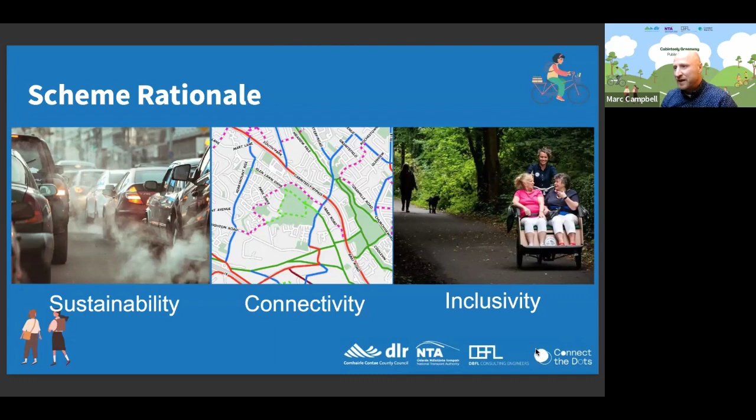So in terms of the scheme objectives, firstly it's to enhance connectivity between Cornelscourt and Cherrywood for pedestrians and cyclists, and to encourage more walking and cycling trips.

Two is to improve safety for people walking, wheeling and cycling, by maximising segregation of pedestrians and cyclists from vehicular traffic. And that's quite an important one to bear in mind - it's about the segregation, it's about the safety and security.

If we manage to get that and people feel safe and secure, there's more likelihood that we can encourage people to get out and do those short trips by wheeling, cycling, and walking, rather than jumping in the car because they feel it's a safer way to do it - to reduce reliance on car trips by providing sustainable alternatives, such as active travel means of getting around.

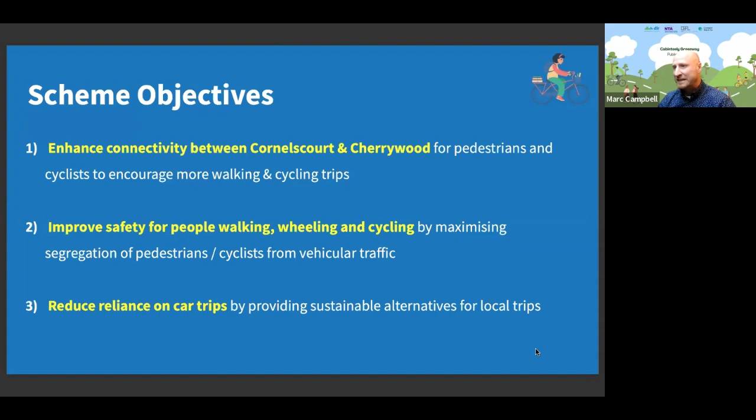Number 4 is to contribute to the achievement of climate action targets. And that brings us back to the press release we received this morning from the EPA, and how we can start to reduce our emissions in the transportation sector.

Five, to improve accessibility to public transport by walking and cycling - just ensuring that everything is connected, that we can walk and cycle to our bus stops, our Luas lines, and our train stations, leave our bicycle or just jump on the train and get to our destination.

And to deliver a proposal that is holistic in its approach, focusing on nature-based solutions and sustainability where possible.

What does that mean for this particular project? We're really looking at things like surface runoff, and how we deal with downpours and deluges so they're not just going straight back into the stormwater system, which is already under pressure, but how we deal with it and recharge the surrounding green environment. It's also about the planting of trees, the management of pollinator sites, and SUDS, the sustainable drainage systems.

So there's a huge amount of things we can focus on in terms of positives for the locality, and finally, to produce a design that is sympathetic to all environmental issues.

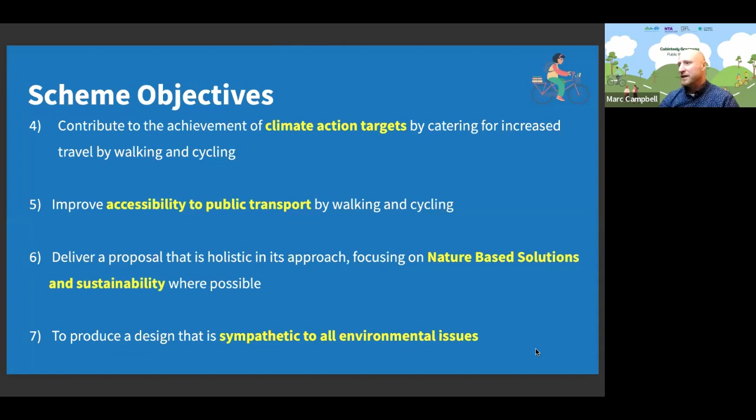This slide highlights that greenways aren't just about the rural environment. There's a huge amount of press about fantastic greenways around the country, often associated with disused railway lines, which are great for tourism and the local community. But equally, we can have greenways in urban environments, taking a slightly different form as a sequence of green spaces, connected by the greenway. It's about pulling routes through safer environments - parkland and green spaces in residential areas - connected to the community, with huge benefits resulting from these types of projects.

You can see here in Blackrock Park, a great park to visit to see how these projects work successfully. At the Booterstown entrance, before it was put in place, it was a really ill-defined approach into the park - a green space that just bled out into a windswept junction with no definition at all. As you can see now, it's a really inviting approach to the park itself. We now have a strong entrance on the Blackrock Village end and a strong entrance on the Booterstown end, showing the improvement to the parkland itself.

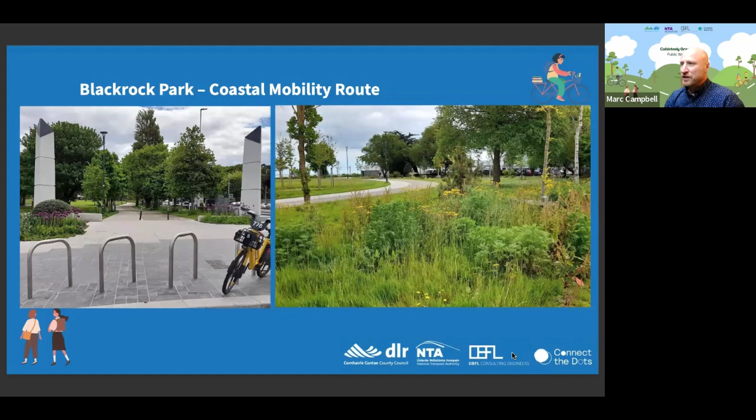The purpose of this slide is to identify a few concerns we see raised time and time again - people worrying about how emergency vehicles get to their destinations because more road space is being taken over by cycleways or pedestrian ways.

The fact is, these are improvements for emergency vehicles. In times of congestion and peak volume, when there are lots of cars on the road, cycleways are freed up for emergency vehicles to use. You can see the image on the left from London, showing an ambulance using a shared cycleway, and our own coastal mobility route in Dún Laoghaire, where an ambulance is able to use it. Not only do they bypass congested traffic, but for Cabinteely Greenway, they'll be able to reach currently inaccessible areas. When the greenway goes through, it opens those spaces up again for emergency vehicles to access.

One other small concern that keeps cropping up time and again is the fact that taking cycleways and pedestrian ways away from road space is somehow seen as a negative towards elderly people and people with mobility difficulties who really need to use the car. In fact, it's far from that.

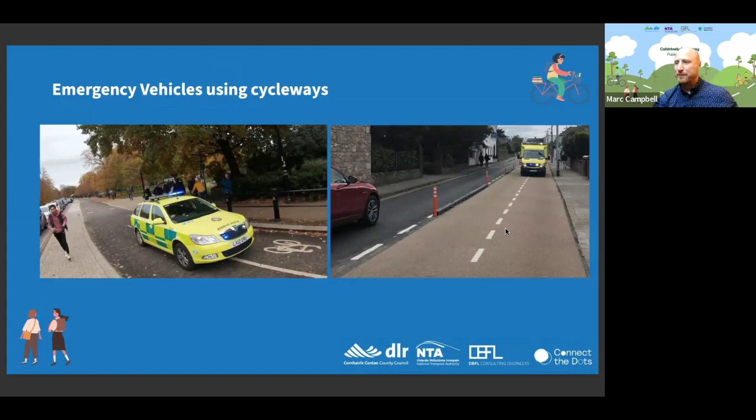Great, okay, so this is just a brief bit about us. We are a stakeholder engagement agency, so we work with various local authorities, government bodies and government departments on anything to do with stakeholder engagement and public consultation.

These are just some of the values we bring to the project. I'm going to be quick about the consultation process so far so you get a sense of what we've done and what's come out of the consultation activities, then I'll hand you over to the DBFL slides giving the overview of the plan so far.

We had a public session last month in June, and out of that it was decided that this webinar needed to be held to tackle the fact that we had many more people who needed to engage with the project in this way. So it's positive — many people wanted to engage.

We had 5 workshops last year and the start of this year: a residents workshop in November, a community and businesses workshop in December, and then primary, secondary school and disability advocacy group workshops in January and February of this year. A total of about 104 attendees, probably more based on the public session where we had over 100 people.

At the workshops, the main focus was on a couple of themes which you'll see throughout these slides: number one, safety; secondly, design and use; and thirdly, the Greenway route options and layout.

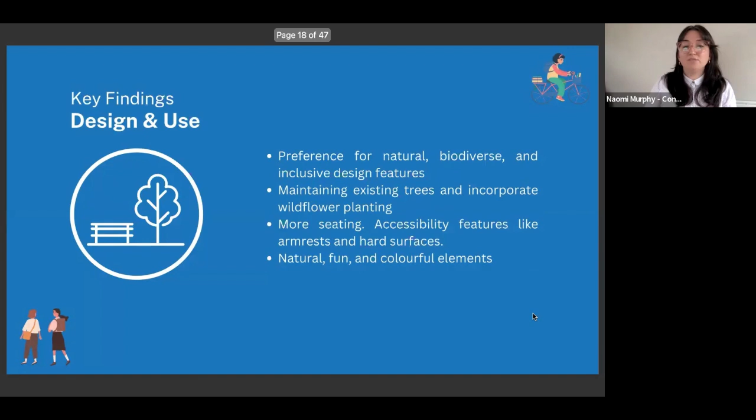In terms of design and use, there was a preference for natural, biodiverse, and inclusive design features, maintaining existing trees and incorporating wildflower planting. More seating was seen as a positive, along with accessibility features like armrests and hard surfaces, and a preference that it should be natural, fun, and have colourful elements.

In terms of route and layout, discussion focused a lot on path design, markings, and surfaces. There were concerns around visual contrast for individuals with visual impairments and the inclusion of shared paths. Some of that will come up in the next slide.

On potential impact on existing environments, there were concerns about noise pollution, disruption of natural habitats, and being sensitive and conscientious to that, as well as disruptions through construction. There was also positivity around improved local connectivity and excitement about the environmental benefits of the project.

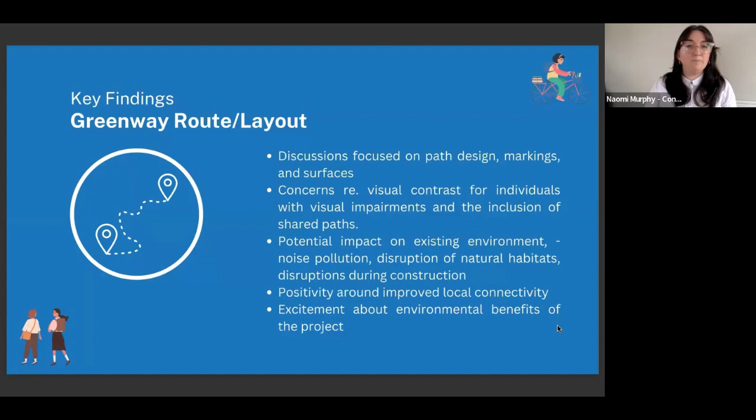This is one of our last sections, around accessibility and inclusivity. In the disability advocacy workshop, comprehensive input was provided on various things to consider going forward - the importance of contrasting path colours, consistency in design so the delineation between paths is clear, considerations for visual impairments, standardization in layouts, accessibility of seating, play areas, signage and shelter, and the need for inclusive design and post-design consultation with disability groups to make sure all concerns are addressed.

For next steps, a full report will be published on the DLR website, including feedback from the public session last month, today's webinar feedback, and tomorrow's recorded viewing session for anyone who can't access Zoom or get online for whatever reason - that'll be in Deansgrange Library at 10 a.m.

Regular updates will be posted to the project page on the DLR website - I can make sure you have that, there's a link at the bottom here. I can circulate these slides to anyone registered to this webinar, and anyone registered in general will be notified via email on the further consultation stages.

The public will be invited again - anyone on this call, anyone engaged so far - to make further submissions on the final plans during the statutory process, the Part 8 process, which is to be confirmed. This gives a sense of where we were with the design workshops last year into the start of this year with community members, the preliminary design in phase 2, which includes the phase we're currently in, and then the statutory phase, happening in Q4 of 2024.

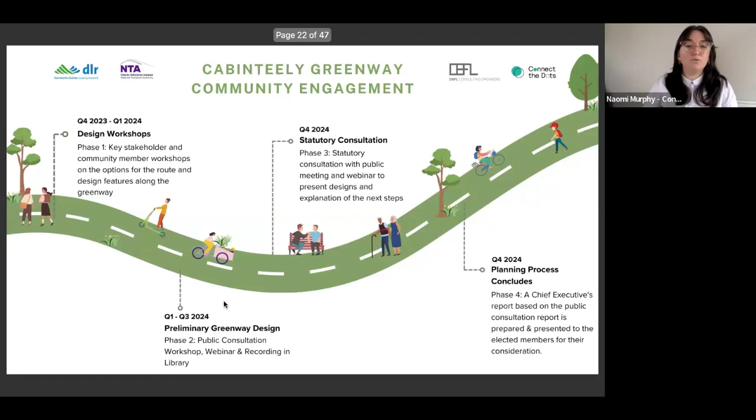Thanks, Robert. Thanks, Naomi. Can you hear me? Yeah, great. Good evening, Robert Kelly's my name.

I'm director with DBFL Consulting Engineers, and I'm just going to add a bit more detail to what Mark and Naomi have covered, specifically in relation to the proposed or emerging proposed scheme. Naomi, if you want to move on a slide or two there.

So what we'll cover is the proposed route or the study area under consideration. Then we'll look at the emerging draft designs and go into a bit more detail to give some background, and then reiterate some of the next steps to wrap up before handing back to Naomi. If you want to move on a slide there, Naomi, another one again please.

The proposed route, or the study area, is in essence just over 2 kilometres in length. The scheme is to connect Cornelscourt Village, around the junction of Old Bray Road and Cornelscourt Hill Road, and then extend eastwards towards Brennanstown to connect with the recently completed Druids Glen scheme, and then onwards into the Cherrywood Greenway network.

For ease of reference and ease of assessment, we've broken the study area into four character areas or sections. I'll go into each of those sections now, talking about the current conditions and constraints, and then the emerging preferred designs.

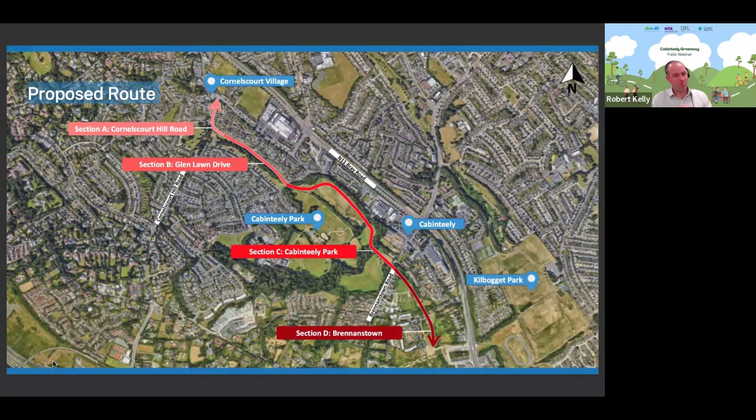So, the first section, as I said before, the extent of the scheme is at the junction between Old Bray Road and Cornelscourt Hill Road. This first section, in essence, really addresses Cornelscourt Hill Road.

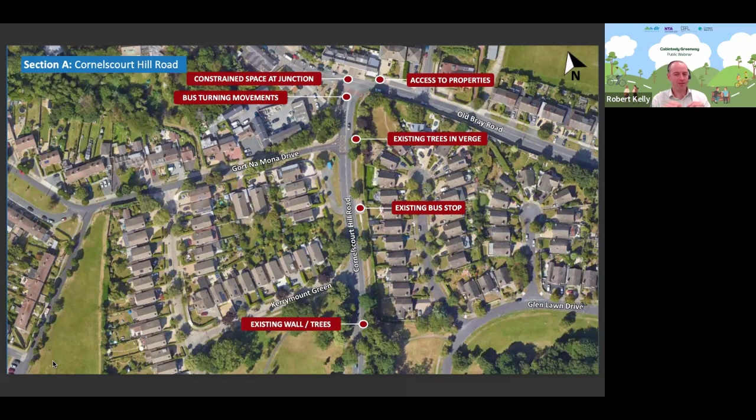Here we have a number of constraints to consider. Obviously, Old Bray Road itself is quite restricted in terms of its width. We have to accommodate existing traffic movements, bus movements. There are a couple of bus stops, and there are also existing trees and boundary walls there which have to be respected.

Bus stops along this stretch will also be upgraded, and there'll also be a further controlled crossing point on Cornelscourt Hill Road to aid anybody looking to access the Greenway, particularly from the likes of Gort Na Mona Drive and Kerrymount. So the scheme then continues through into section B, which is on the next slide.

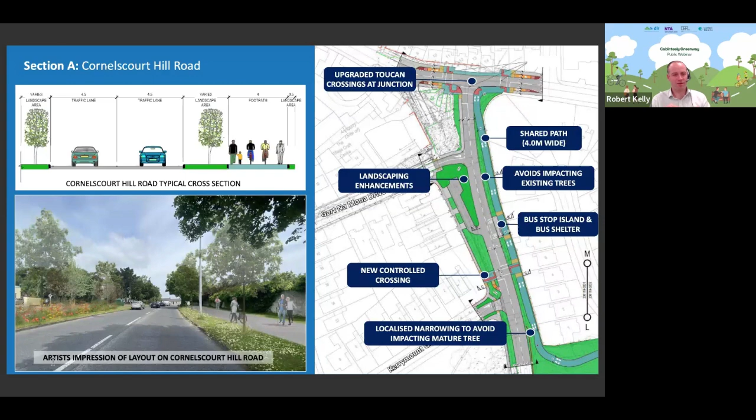We have existing through traffic. We also have the stream and the trees adjacent to the stream, the green area surrounding the stream, which is of high value from a public amenity and biodiversity perspective. So we want to respect that.

We've noted safety issues, particularly at the roundabout at the Glen Drive junction at the eastern end of this particular stretch, and then obviously facilitating access for residents within the area. There are also quite challenging gradients down towards the stream, which we have to negotiate also.

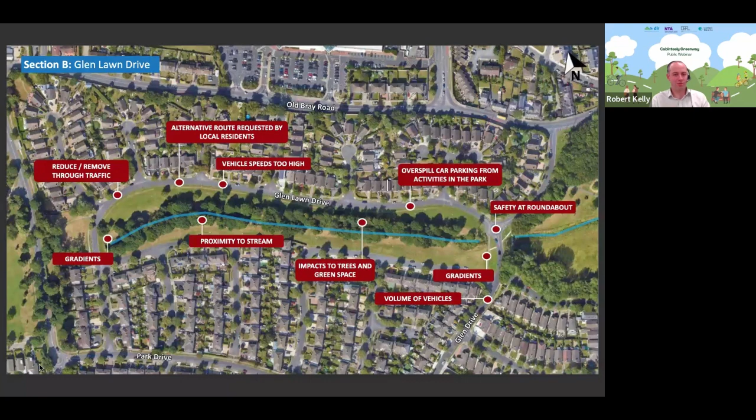In this particular section, we haven't finalized our plans with regard to what option would be preferred. There's a number of options which I'll present here - three options for consideration at this stage - but I'll go into more detail as to the different characteristics of those options now.

Option 1 essentially involves the provision of a shared use Greenway on the northern side of that green area, to the north of the stream, but immediately adjacent to the Glen Lawn Drive road. That'll be a 4-meter wide shared path, as is proposed on the Cornelscourt Hill Road section also.

We're trying to keep away as much as we can from the existing trees and the stream itself, and in doing that, we would preserve all existing trees, and we propose to enhance the public realm and planting around there also, as there'll be proposed additional greening between the Greenway facility itself and the adjacent street.

A key feature of this particular option is that there'll be additional traffic calming proposed on Glen Lawn Drive to reduce speeds and make Glen Lawn Drive safer. There's a proposal to provide landscape build-outs, and I'll give you more visibility of that in the next slide.

At either end of Glen Lawn Drive, there are two proposals: to upgrade the roundabout on the eastern side to provide enhanced pedestrian and cycle crossing facilities and improve general safety, and then on the western end, to implement a modal filter through Glen Lawn Drive, which would facilitate pedestrian and cycle access only. I'll go into that in more detail in the next slide or so.

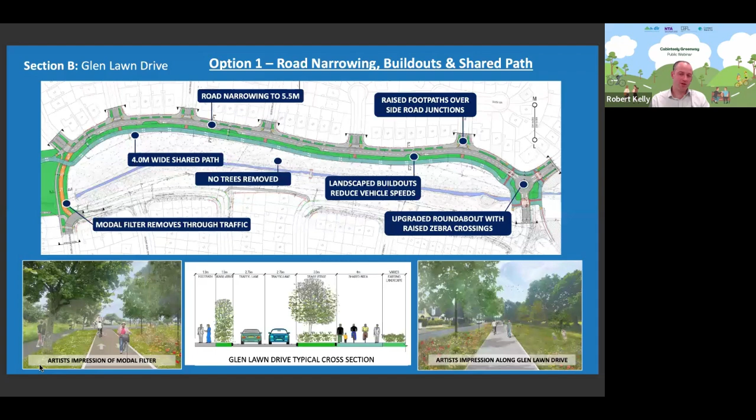The next slide goes into a bit more detail on the type of arrangement proposed under option 1, which are basically landscape build-outs. These act as a dual purpose traffic calming feature, whereby traffic would have to give way in one direction for the other, calming traffic on Glen Lawn Drive, and the additional build-outs could facilitate landscaping and some of the SUDS features which Mark alluded to in his slides.

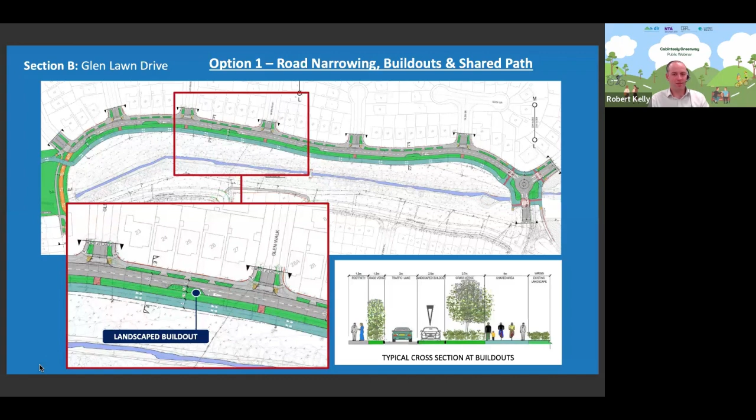The next slide touches a bit more on the proposed modal filter, which is a measure to reduce through traffic on Glen Lawn Drive and protect it for local access only, providing a much calmer street environment. This is a feature which has been implemented in a number of locations across Dublin and Dun Laoghaire-Rathdown recently.

Such a feature has been implemented in Eden Park, near Goatstown, Dromartin area, where there was a significant issue in relation to through traffic. That was removed following the implementation of the modal filter, which allows for movement of pedestrians and cyclists only. I think that has been well received by residents in that particular area.

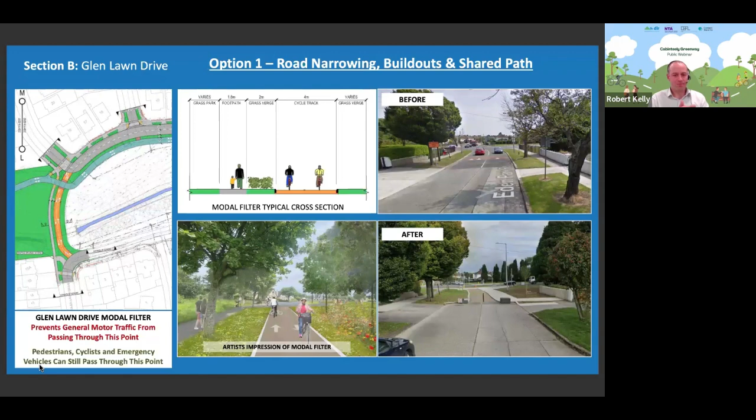The next slide indicates how the through route from Park Drive to Glen Lawn Drive would be removed for vehicular traffic, but facilitated for pedestrians and cyclists. It still indicates that there is access to all residential properties via Glen Drive and Park Drive.

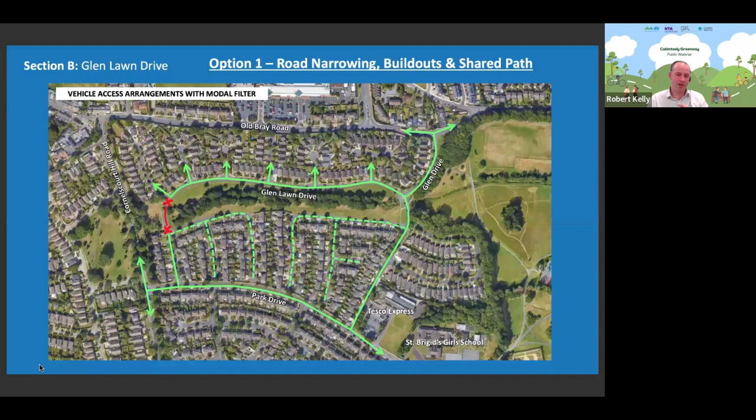Moving on to option 2, which is quite similar to option 1, but doesn't propose to implement any of the landscape build-outs on Glen Lawn Drive. So Glen Lawn Drive would, as you can see from the cross-sectional image, keep one traffic lane consistently in each direction. The Greenway facility would again be a 4-metre wide shared facility with a landscaped buffer between it and the street. As with option 1, the proposal to upgrade the roundabout and the modal filter would apply.

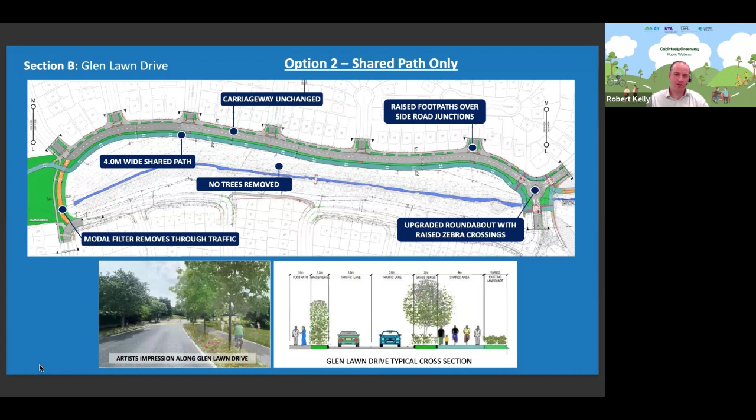Option 3 would essentially be, on the basis of reduced traffic volumes on Glen Lawn Drive as a result of the modal filter, it may be appropriate that pedestrians and cyclists use Glen Lawn Drive and share that street with vehicular traffic given the lower volumes and lower speeds that may be present. So there would be no proposal under this option to actually construct the Greenway within the green area, which would remain as is, essentially.

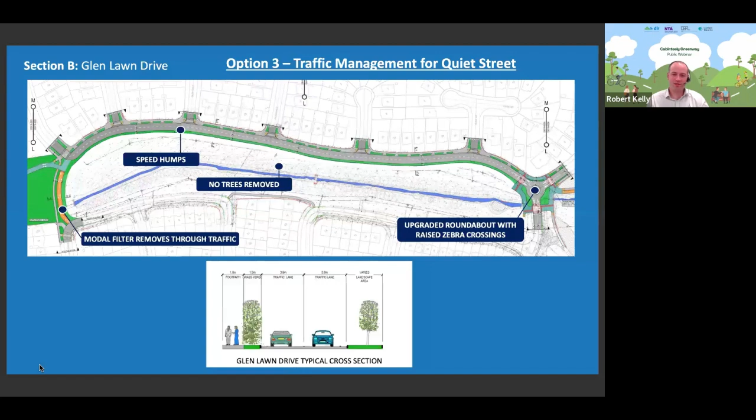So the next slide, we move into section C, the third section, which is essentially through Cabinteely Park. It's important to note that a lot of people will be fully attuned and knowledgeable on the various constraints within Cabinteely Park, both natural and man-made, as there are obviously constraints with regard to biodiversity.

We've got rich meadowed areas, and we've got to respect the built heritage of Cabinteely House itself. We've got challenging gradients through the park as well, to ensure we construct a scheme which is universally accessible. Then we've got interactions with other existing users of the park, such as the football pitches, which are quite busy particularly at weekends, and we also have extensive areas of woodland. We have to consider the opening hours of the park itself, and whether a Greenway facility through the park would be accessible, for example, in hours of darkness in the winter.

So the next slide, please. The emerging preferred route at this stage proposes to come to the park and follow the existing trails to the north of the football pitches, upgrading those routes on the basis of anticipated increased levels of activity in the park, and general activity of people accessing the pitches and other amenities within the park. The Greenway, crucially here, would provide for a separate 3 metre wide cycle track and a 2 metre wide footpath, as opposed to the 4 metre wide shared facility elsewhere.

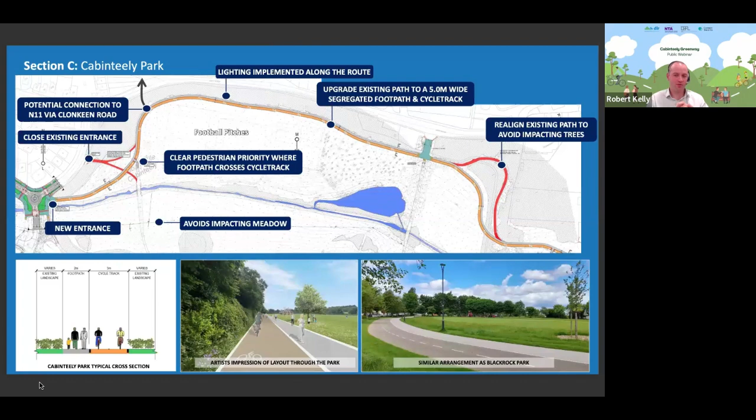So the next slide, Naomi, I think, shows the constraints associated with the final section, which is section D, fundamentally the section of the scheme which crosses Brennanstown Road and then leads on towards Druids Glen, into the scheme extent, essentially tying in with the Cherrywood Greenway network.

Some of the constraints here - obviously we're crossing a road at Brennanstown Road, so consideration has to be given to providing a safe crossing point. Then when we move westward beyond Brennanstown Road, there's an area of dense woodland which is not really accessible at present. There are informal trails, some elements of fly tipping etc, but generally it's a fairly natural environment which we need to respect. And we obviously still continue to border the stream.

And then as we cross Brennanstown Avenue, there's proximity to apartments and residential units which we need to respect, and also there's opportunities there with regard to integrating with future development of residential properties.

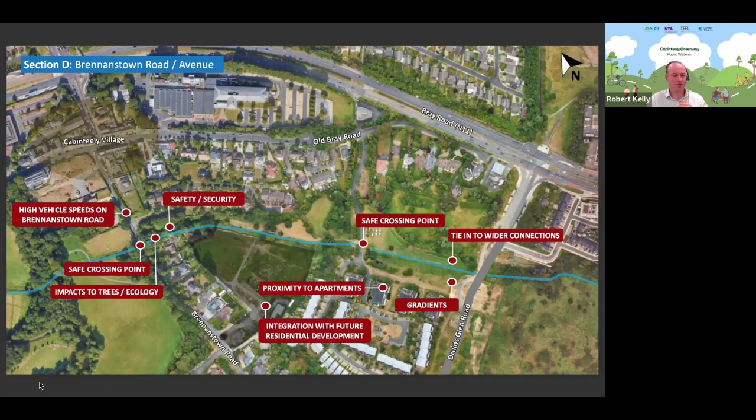So the next slide, Naomi, goes into more detail on the actual proposals as they stand. On section D, you can see as we come through the park, we have that previous arrangement of the segregated cycle and footpath. When we move westward of Brennanstown Road, we revert to the shared facility, the 4 meter wide shared facility, on the basis that the levels of activity would not be as high as one would expect through the park.

There's a potential opportunity for connection to the future residential scheme to the south of the stream, but generally we're keeping the Greenway to the north of the stream until we approach the residential development off Brennanstown Avenue, at which point we cross over to the south of the stream, respecting separation distances from those residential apartment developments, and we connect in with the recently completed Druids Glen bridge scheme.

So the image on the bottom right, the center image, shows the 4 meter wide proposed shared facility through that section just south of Carraig Glen, and on the left we have a cross section which shows, quite crudely, how a 4 meter wide shared section or greenway would look in the context of the stream.

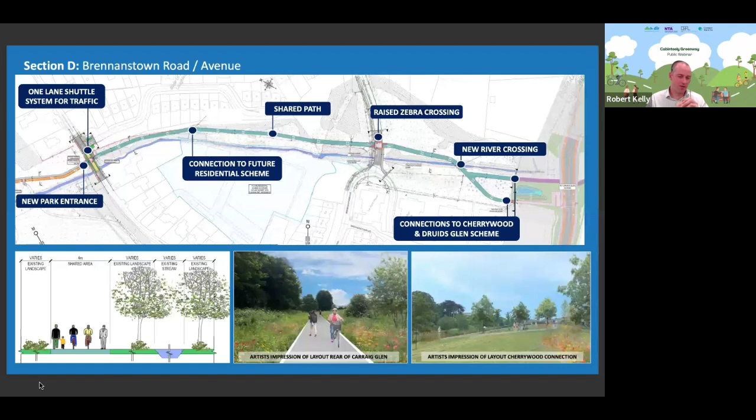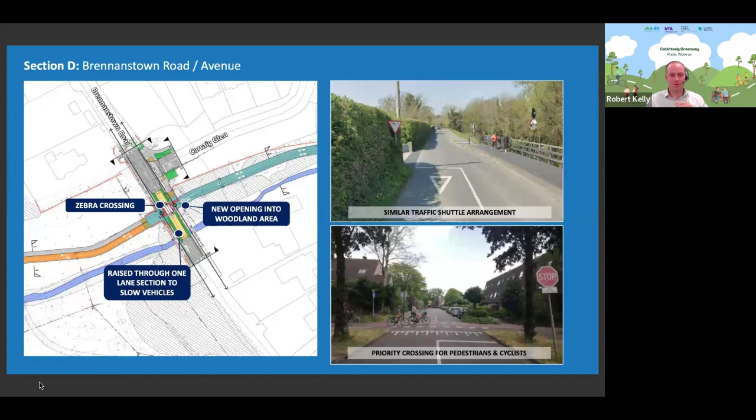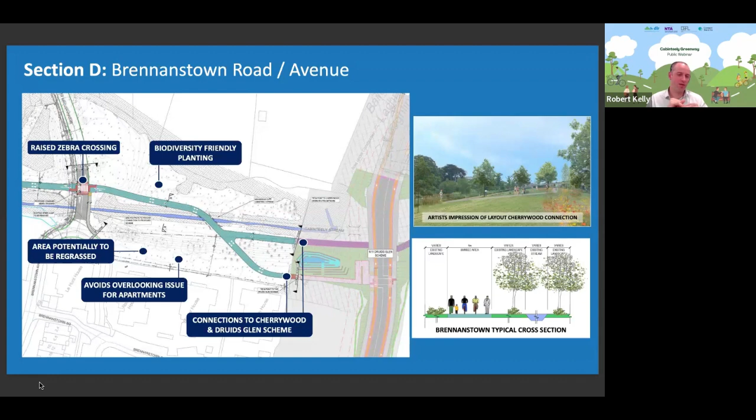So we'd also have an additional raised zebra crossing across Brennanstown Avenue, which is the access road to those residential properties. Next slide, Naomi, please.

So I'll hand back to Naomi because I think that's my last slide. Yep.